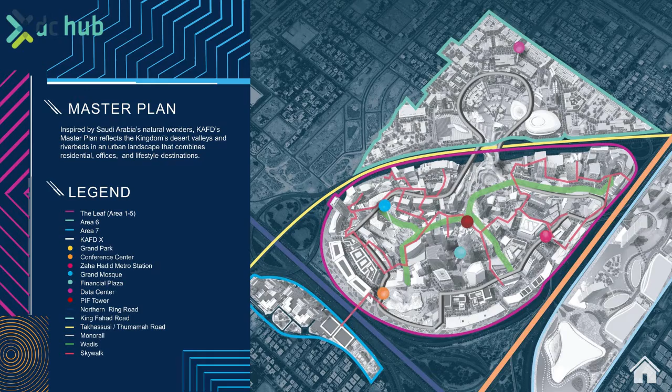The overall district is really bringing to life our community here in Riyadh. It's very unique in various respects, and we're really looking forward to what we're doing now, which is welcoming visitors and tenants into this whole new world.

Now, in terms of the journey and the challenges so far for the digital twin, right now we're pretty much in the early phases of that journey.

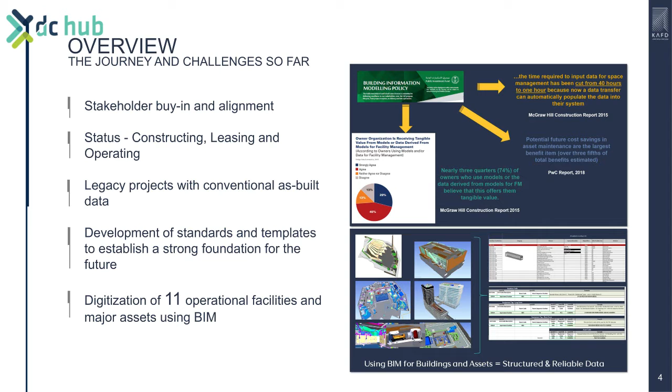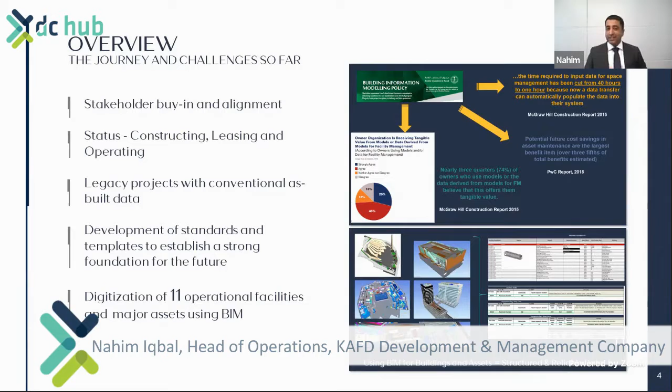What's great is that we really have support and buy-in from the top level, which is the company that owns the whole development, and the King Abdullah Financial District Development and Management Company, also wholly owned by the PIF. The first point is really understanding that stakeholder buy-in and alignment is key, right from the top in terms of leadership through to the various departments and supply chains we're working with, in order to ensure that we are really digitizing our assets and understand the value that needs to be derived from that process.

We've pretty much found that within our organization and across most of the entities we're dealing with, there's no need to try and sell BIM. It's already realized as providing real value across the world, from the likes of the McGraw Hill Construction Report, PwC reports, and there are many case studies across the world.

Beyond that, in terms of the second point, what's really critical for us right now is having reliable and accurate information. That's really because we're concurrently constructing, leasing and operating the district, all happening at the same time, which has its own challenges. Again, the need for real accurate information is important to us.

We've had legacy projects which have conventional as-built data, and for some of that we've retrospectively had it scanned and modeled, and then verified on site with some further exercises.

Beyond that, we've also ensured that we've developed our standards and templates to establish a strong foundation for the future. We've started by digitizing 11 operational facilities, appointing our consultant JLL to help with that.

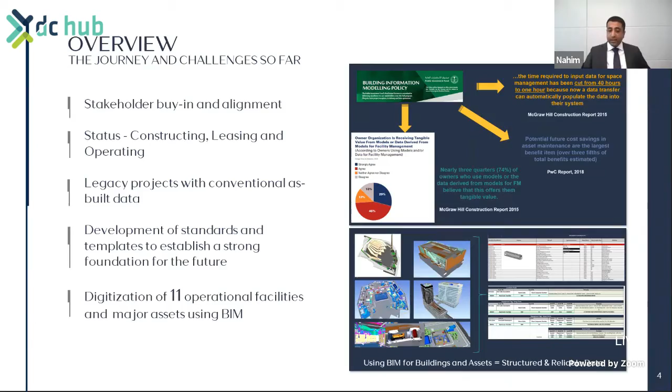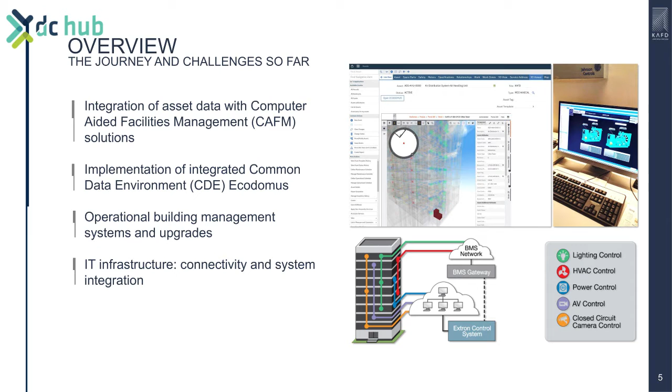And then we've gone on to take that data set of information, those attributes, and integrate that with our computer-aided facilities management solutions here at KAFD in order to operate and maintain our facilities and assets. The other unique thing which we've also done is integrated a common data environment, which is Ecodomus, with our CAFM solution. And this has actually taken a tremendous amount of effort from our teams at JLL, Ecodomus, as well as here within the organization across operations and IT, to support this level of integration where we can gain our facilities and assets which are modeled and created in BIM, and they automatically integrate into our computer-aided facilities management solutions.

The other things that we're currently working on, which are of great significance and importance, are the upgrade of our operational BMS systems and some of the components and systems along with that to ensure that they can fully integrate with the new systems and software packages that are being implemented. And again, along with that comes the IT infrastructure and the connectivity to enable that system integration to happen. So we have various work streams which are currently occurring in order to ensure that we're working towards a fully functional digital twin here in the King Abdullah Financial District.

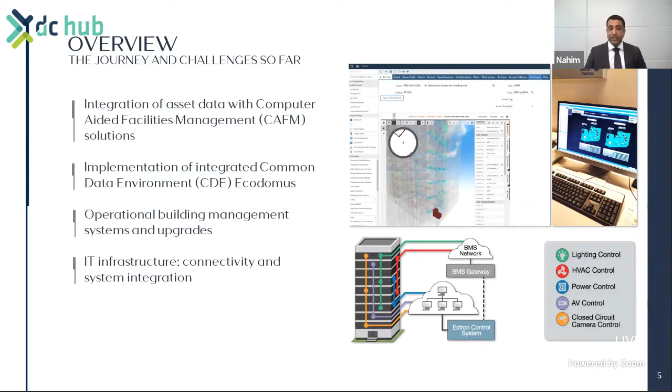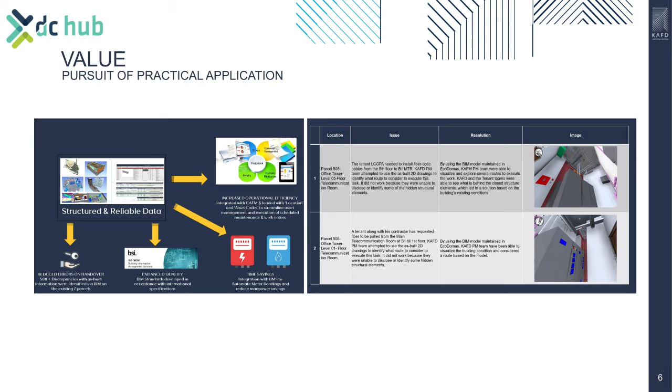Value from that does come in different forms for different organizations and entities across the world. On the right-hand side, you'll see some examples where we're currently using the basics of just BIM to route some of the cables through complicated areas where there's services running in terms of elevator shafts, etc. But really the value for us lies in the structured and reliable data that helps us to reduce handover errors. It will eventually help us to get automatic readings from our meters, from our devices within the buildings. We can monitor that on a live basis.

And really where we're heading towards is increased operational efficiency, because the value in that for KAFD is to ensure that the needs of our customers across the district are really catered for, that we're providing better services across everything we do to ensure that their experience is of the best and highest level in terms of standards.

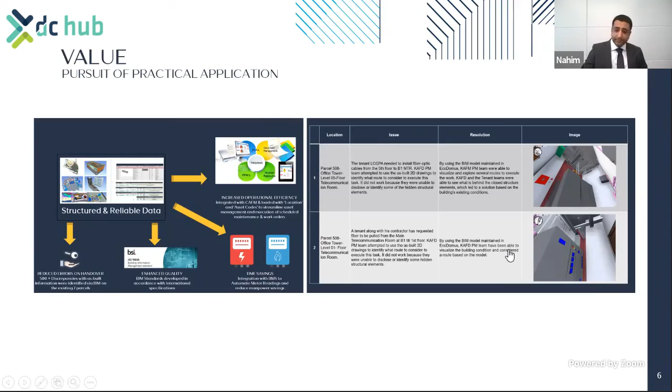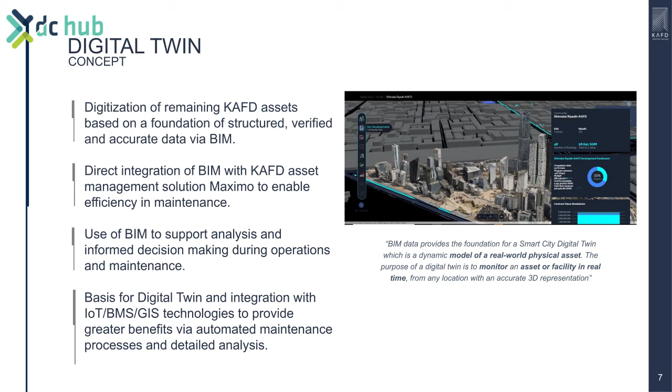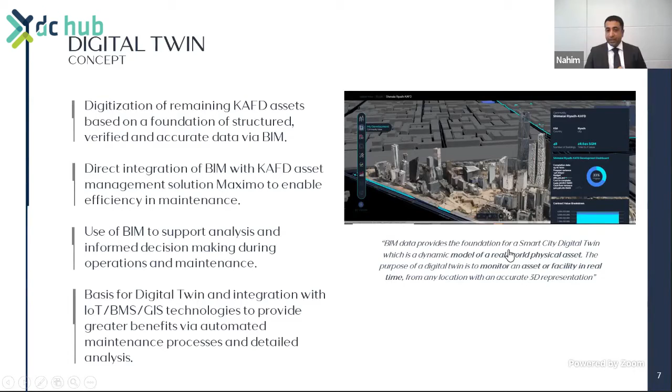And then moving forward, we're currently working towards digitizing the remaining KAFD assets based on a foundation of structured and verified data via BIM. And then that direct integration of BIM with a KAFD asset management solution such as Maximo, again, still enables us to get greater efficiency. We can start using BIM and our digital twin for analysis, decision-making, live monitoring of our facilities. And the image you see on the right-hand side, again, is a very basic concept which was developed for the digital twin, which integrates various data from GIS, BIM, IoT, etc. And that will eventually be a fully fledged solution one day when we've fully completed our journey on this pathway towards digital twin enablement.

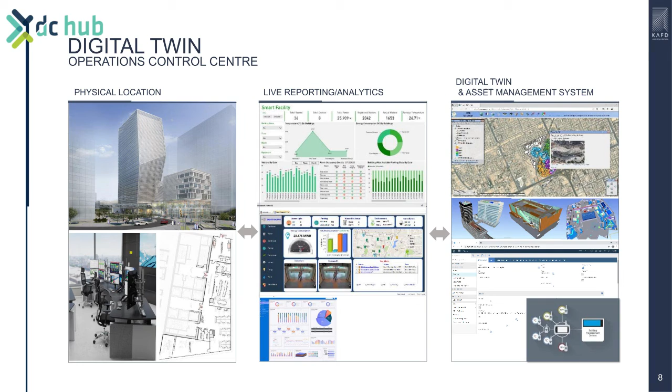And then that will eventually lead on to us being able to, for example, have physical locations where all of our systems and all of our data is feeding in, right from live sensors to the asset management solutions to the GIS data. And that live monitoring will form the basis of our digital twin here at KAFD to ensure that we're able to retain and manage our facilities and assets to a very high standard. And that will have various benefits, whether it's time, the way we respond to our customers, the way we respond to emergency situations, and so forth.

So really, we're looking forward to continuing this journey, which we're very passionate about throughout the organization. And we're working with various stakeholders because this cannot simply be done from a one client perspective. There has to be full engagement from our supply chains, from our partner organizations, and so forth.